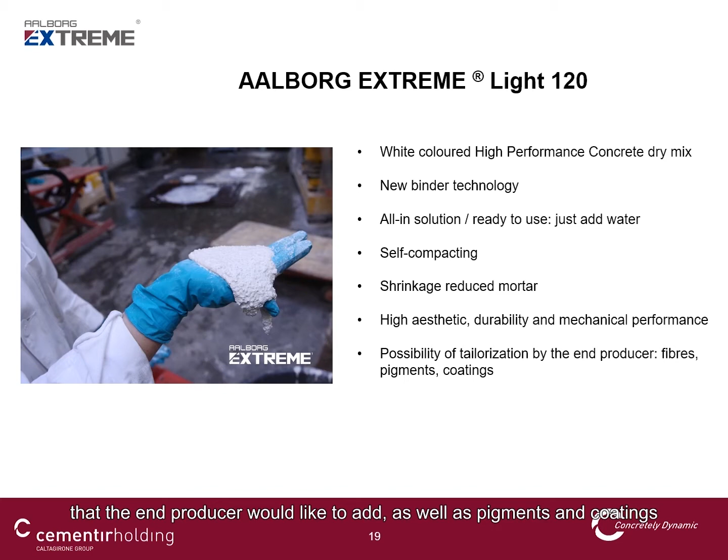So we take the bag or the big bag of AALBORG Extreme Light 120. For each 25 kilos bag, we add 1.95 to 2.1 kilos of water, and then when we mix, after 10 minutes of mixing, we will have a white self-compacting minimum 120 megapascal compressive strength after 28 days and durable material.

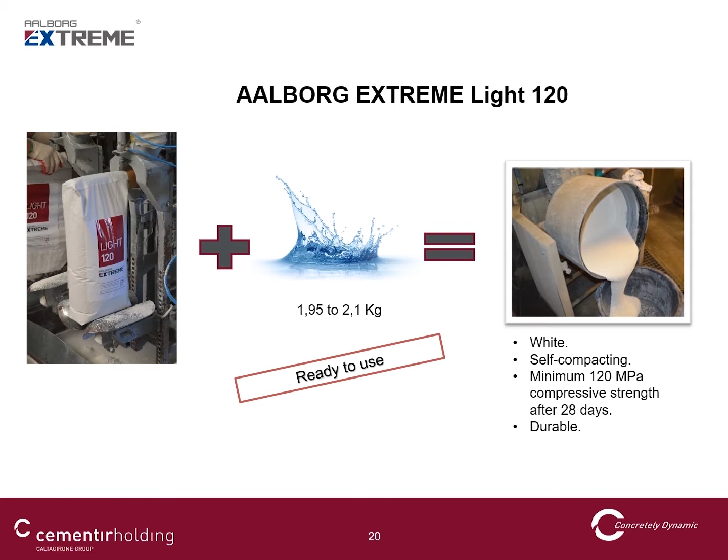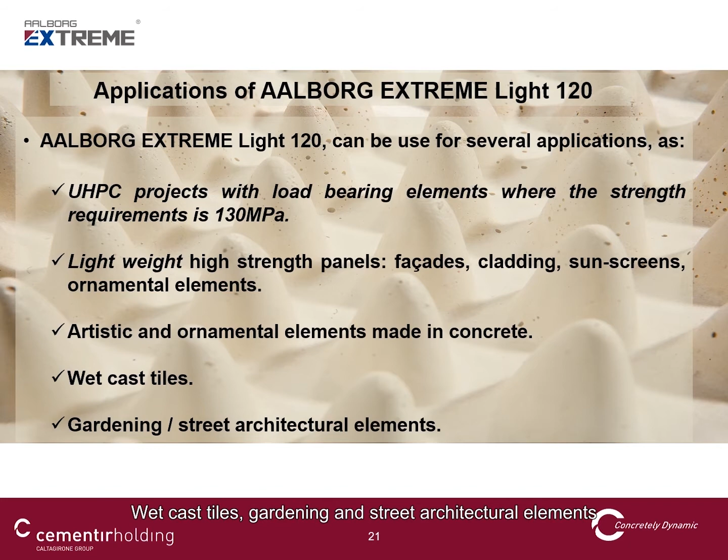There are a universe of applications that hasn't been explored yet with UHPC, same with AALBORG Extreme Light 120, but if we have to point at some of them, I would say that we will have, for example, UHPC projects with load bearing elements where the strength requirement is around 130 megapascal, lightweight high strength panels like facades, cladding, sunscreens, ornamental and artistic elements made in concrete, wet cast tiles, gardening, street architectural elements.

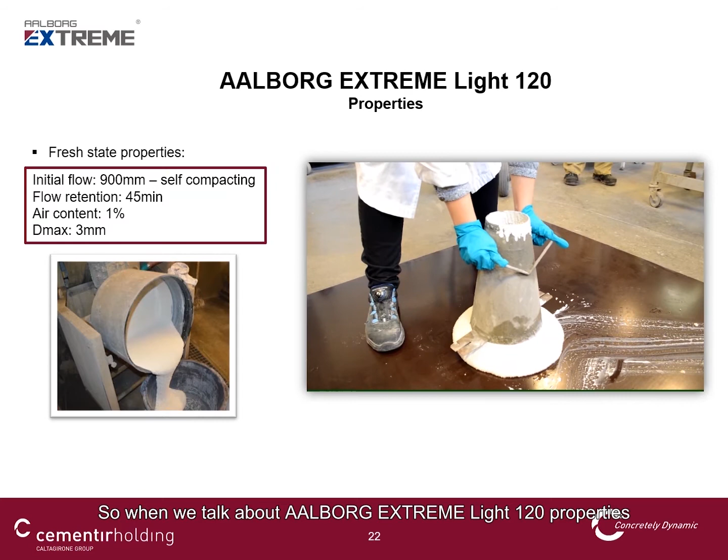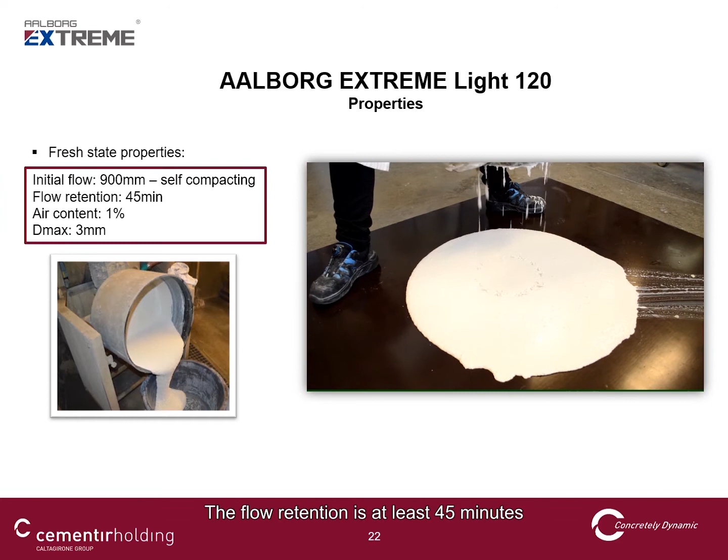So when we talk about AALBORG Extreme Light 120 properties, in terms of fresh properties, the initial flow is more than 900 millimeters, meaning that it's a self-compacting material, as you can see in the video here. The flow retention is at least 45 minutes. Air content is 1%, and the maximum particle size is 3 millimeters.

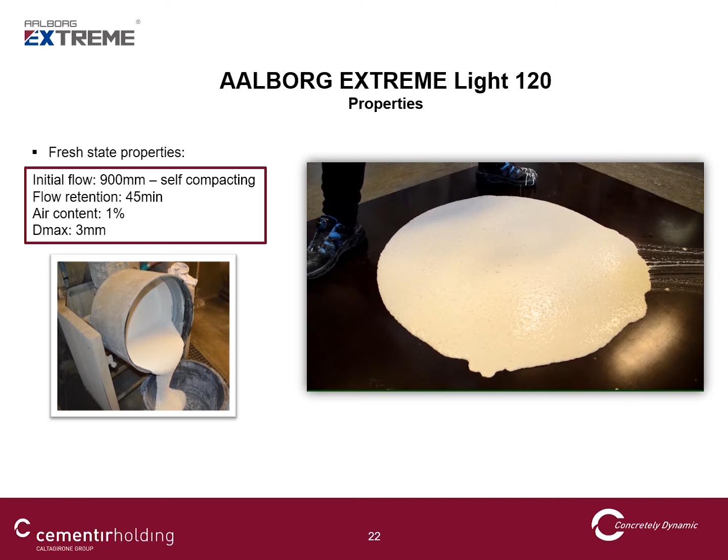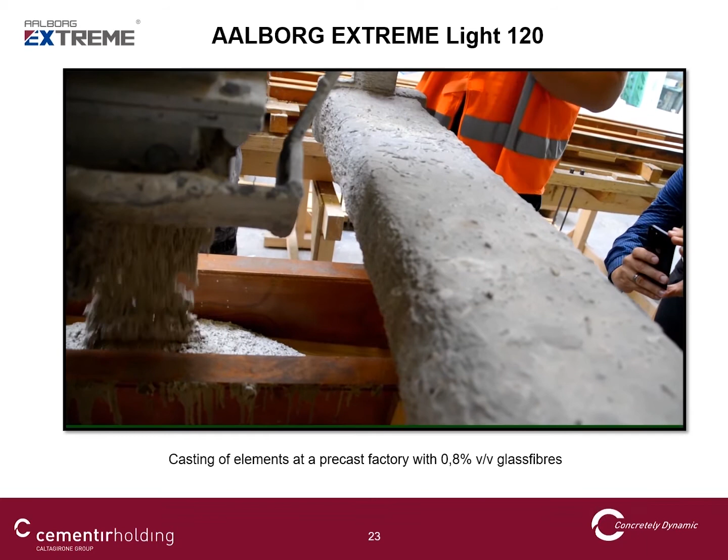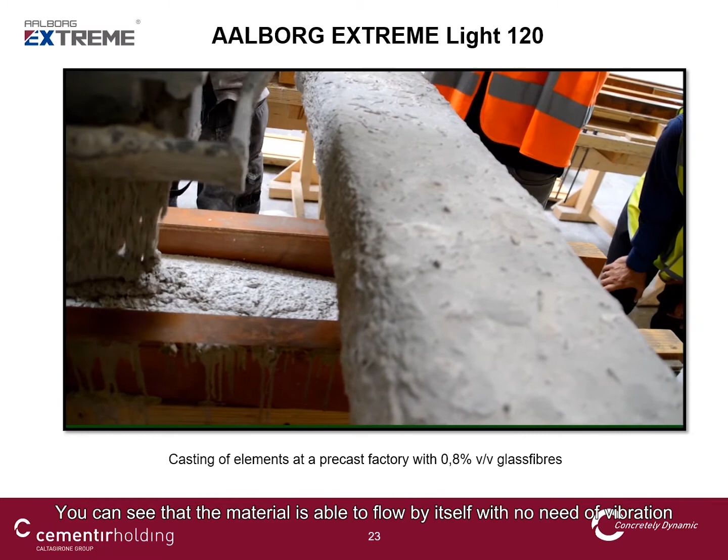So here you can see one of our first trial castings at a customer site with 0.8% volume of glass fibers and the lowest range of water dosage, because that was one of the customer's requirements. You can see that the material is able to flow by itself with no need of vibration. And yeah, I will let you just see the video.

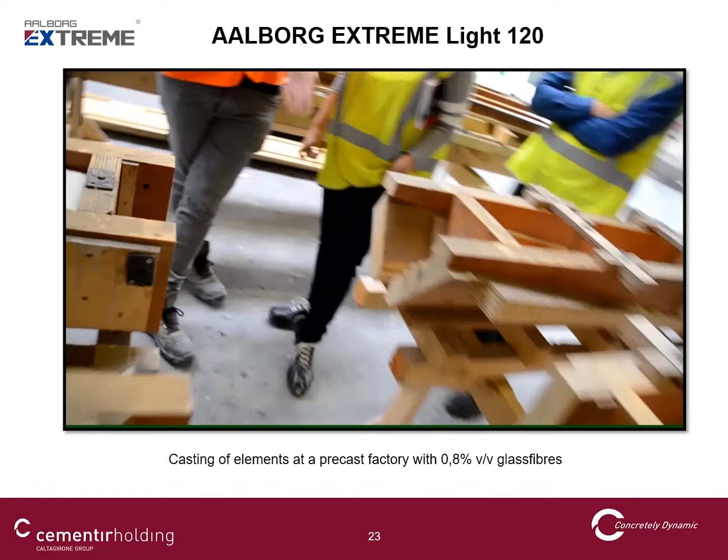These are the properties without fibers of our material, the hardened state properties. We have a shrinkage of less than 600 microns by meter at 90 days, setting time between 6.5 to 7 hours, a very high one-day compressive strength.

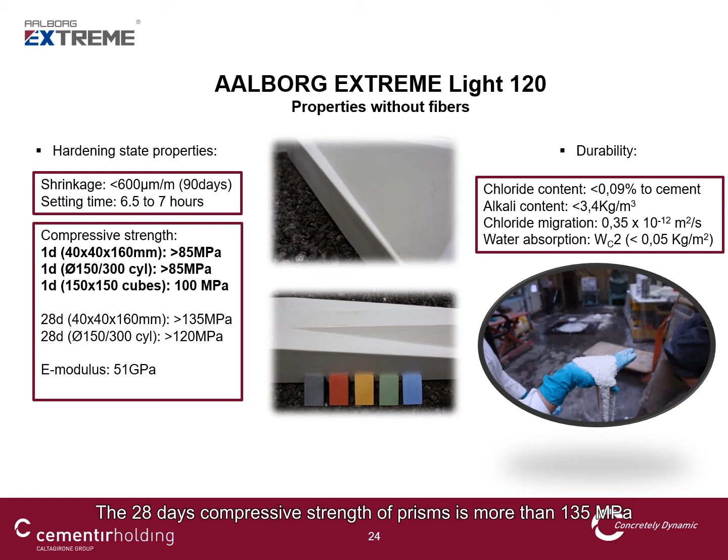In prisms will be more than 85, also in 150 by 300 cylinders, and 150 by 150 cubes, 100 megapascal, and 28-day compressive strength more than 135 in prisms and more than 120 in big cylinders. The E modulus around 50-51 gigapascal, and we also made and measured

lots of durability parameters like chloride content and alkali content and chloride migration and water absorption. They're all in the very good range of durability parameters, but if you want more information about them, you can always consult the product specifications datasheet, where we go more in detail with all these properties, and you can also see there according to which standard we measure them.

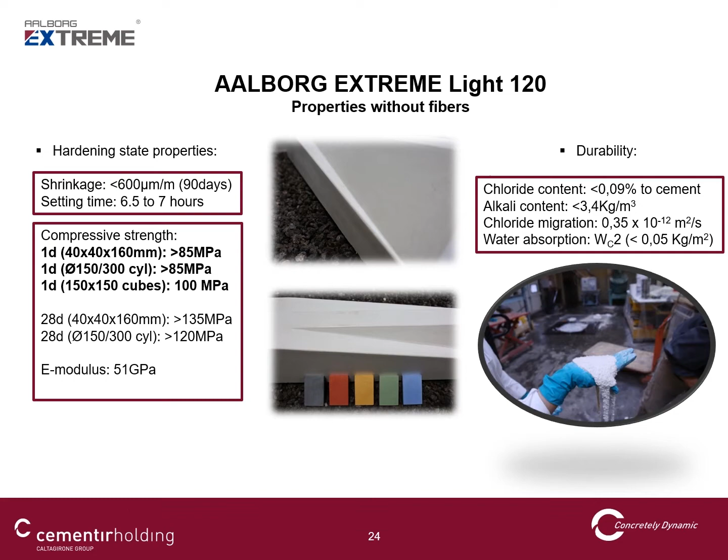It is well known in the UHPC industry that the mixing of high and ultra high performance concrete is different than for standard concrete. Due to the very, very low water addition, it needs a lot of energy to be mixed. So very, very high efficient mixers need to be used.

In the case of Aalborg Extreme Light 120, we recommend that the first time the customer mixes it, they use a lower capacity than the total capacity of the mixer, between 20 and 30%, and then the batch size can be adjusted afterwards. The material will look dry at the beginning for the first 4 minutes, but no more water needs to be added, because due to the chemistry inside the product, it will become fluid after that time.

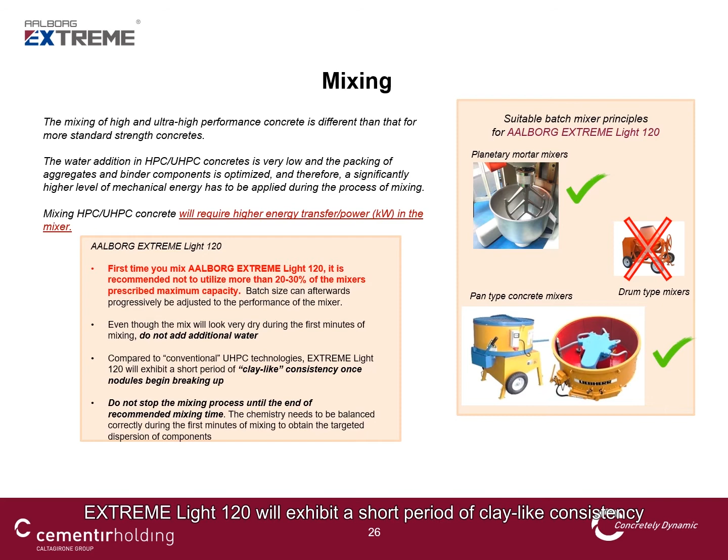And compared to conventional UHPC technologies, silica fume based, quartz flour based, etc., Extreme Light 120 will exhibit a short period of clay-like consistency, where you will see the formation of nodules, but they will start breaking after, like I said, 4 to 5 minutes of mixing time, and then the consistency will be completely fluid. It's important, don't stop the mixing process until the end of the recommended mixing time, that is around 10 minutes.

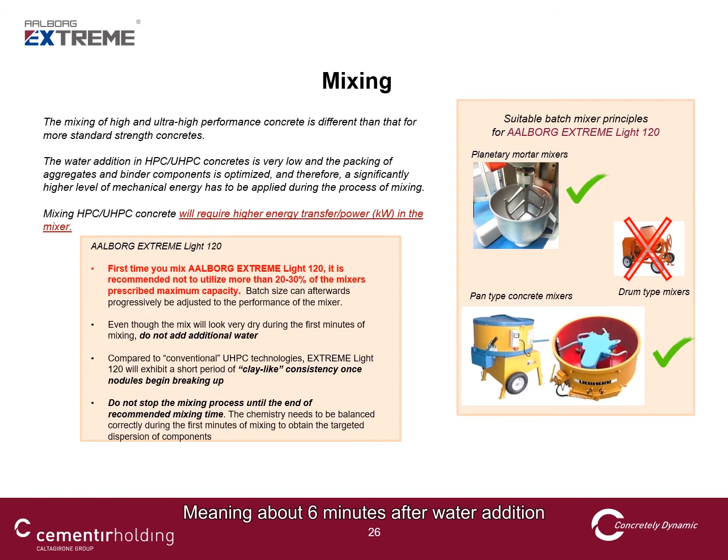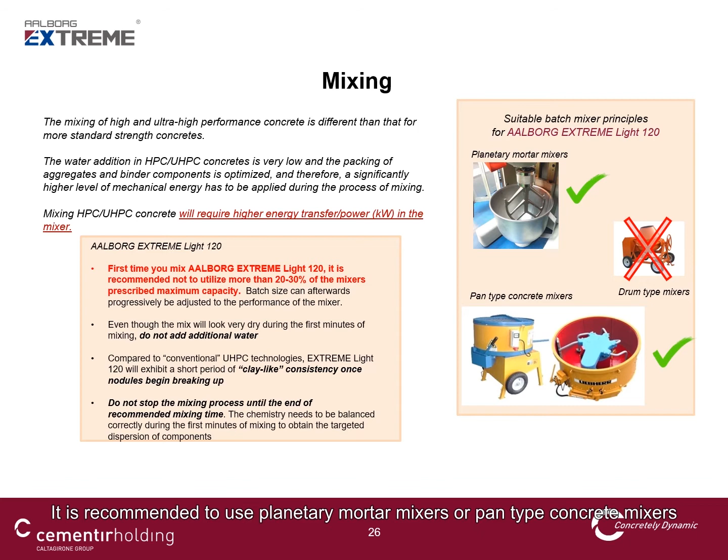And if the customer would like to add fibers, they need to be added after the material is fluid, meaning about 6 minutes after water addition. Drum type mixers are not recommended for UHPC. It's recommended to use planetary mortar mixers or pan type concrete mixers.

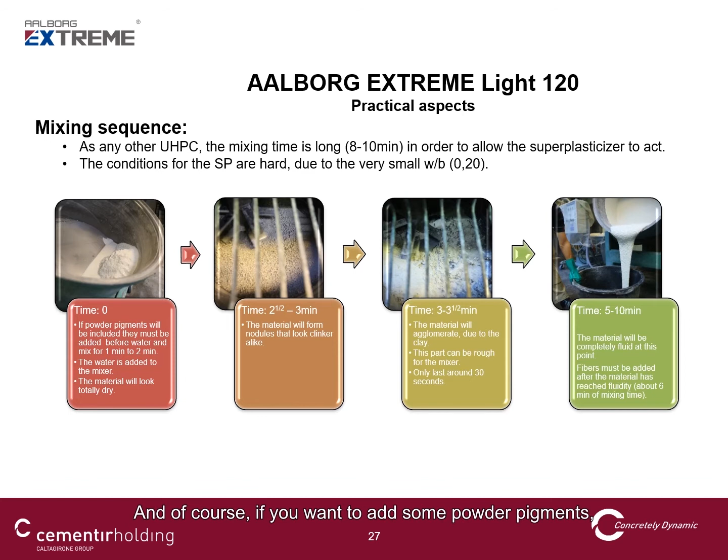So we have divided the sequence into different times. At time 0 you add the dry mix to the mixer. If you want to add powder pigments, this is the moment to add them. You need to mix the dry mix for between 1 minute and 2 minutes maximum, depending on your mixer—you have to check the first time you do it. The dry material should look homogeneous.

Then we add the water. At the beginning, the material will look dry. After 2.5 to 3 minutes, it will form nodules that look clinker-like, like little balls. Then from 3 to 3.5 minutes, the material will agglomerate due to the clay. This part is the roughest for the mixer, but only lasts 30 seconds, and if the mixer is very efficient, it can last even less.

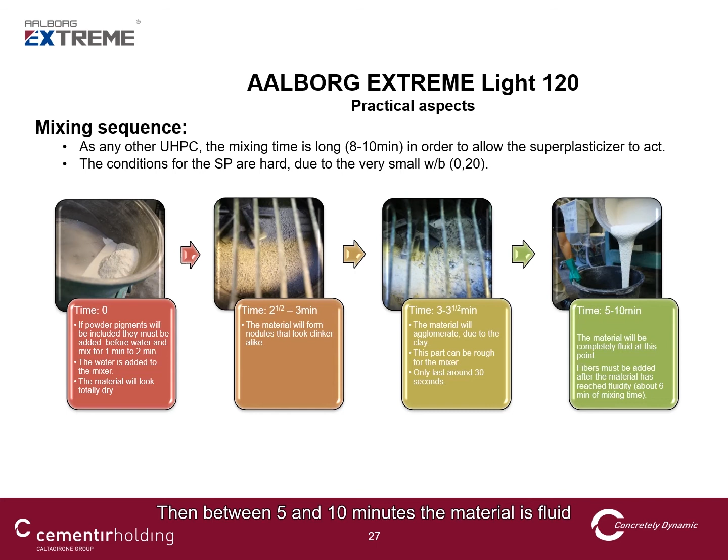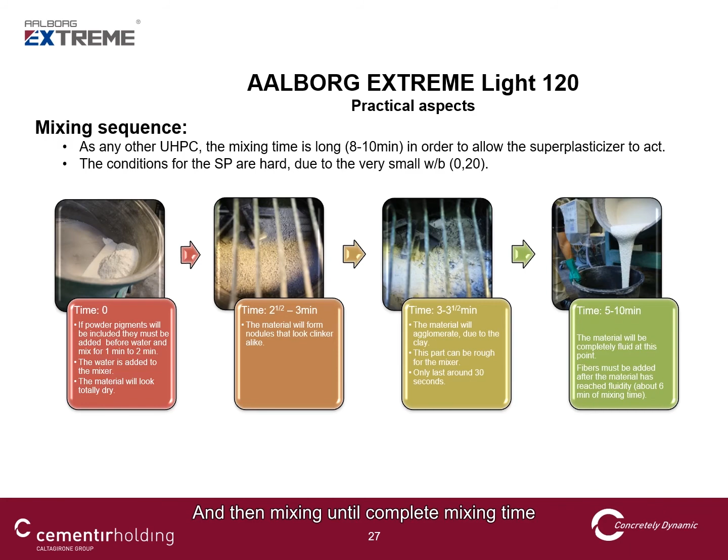Then between 5 and 10 minutes, the material becomes fluid. If you want to add fibers, add them around 6 minutes, so the material is already fluid enough, and then mix until the complete mixing time.

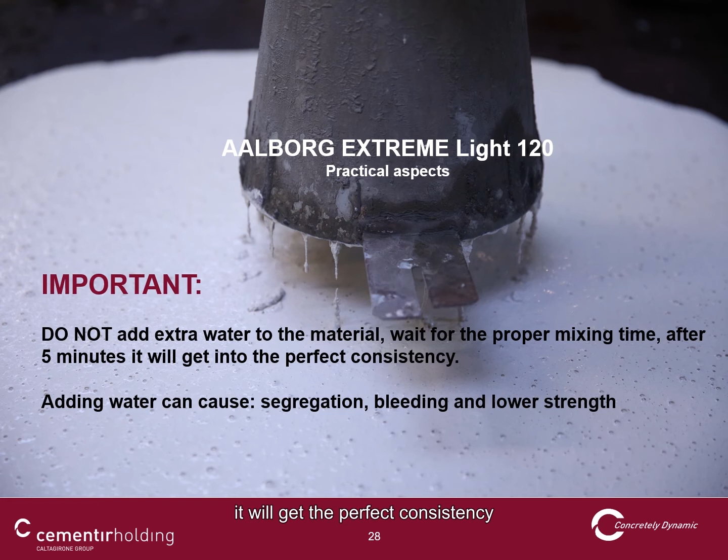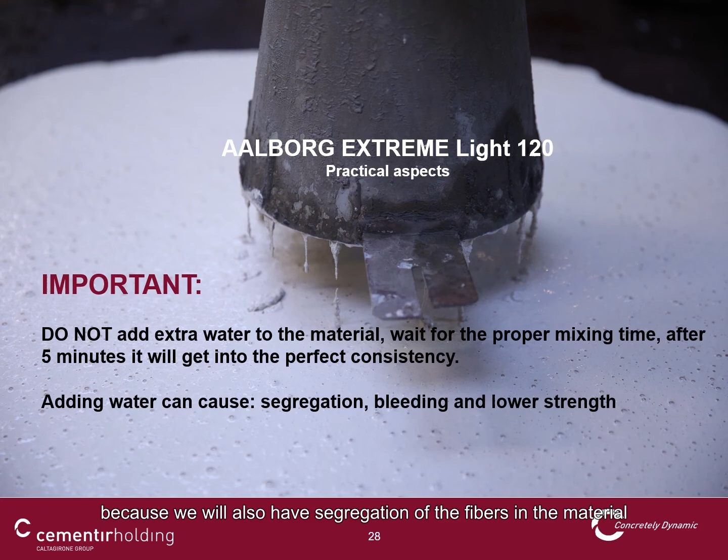As I said before, it's very important not to add extra water to the material. You just have to wait for the proper mixing time, around 5 minutes, and it will get perfect consistency. Adding extra water can cause segregation and bleeding, and of course lower strength. If we have fibers, the problem will be even higher, because we will also have segregation of the fibers in the material.

For the majority of castings, Aalborg Extreme Light 120 does not need vibration, as you saw in the video before. But of course, if the user wants a very detailed shape, or the fiber content is very high, it's allowed to vibrate it. It's not going to cause any harm to the final product.

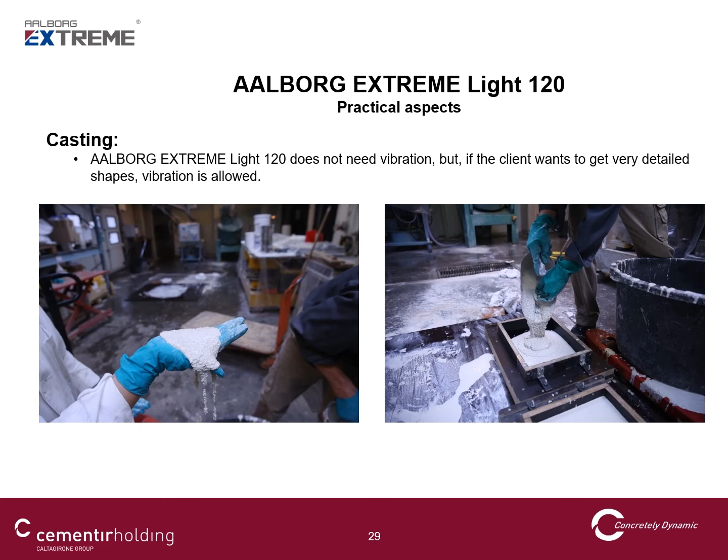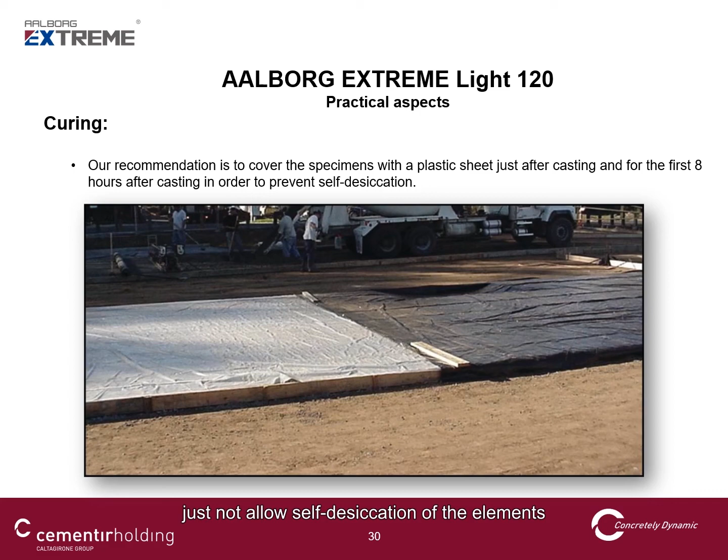In terms of curing, our recommendation is to protect the element from evaporation, meaning it can be covered with a plastic sheet, or a curing agent can be applied to the product. All this is to avoid self-desiccation of elements cast with Aalborg Extreme Light 120, but these practices are also used for traditional UHPC and even traditional concrete elements. So you just have to be careful that what you do does not allow self-desiccation of the elements.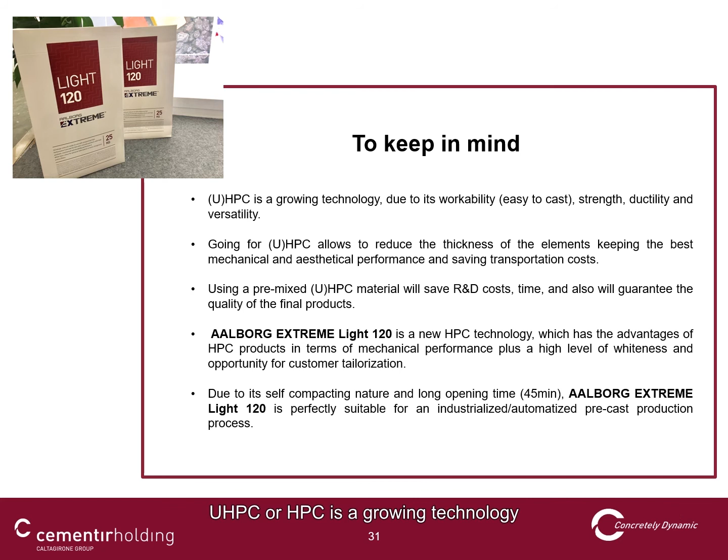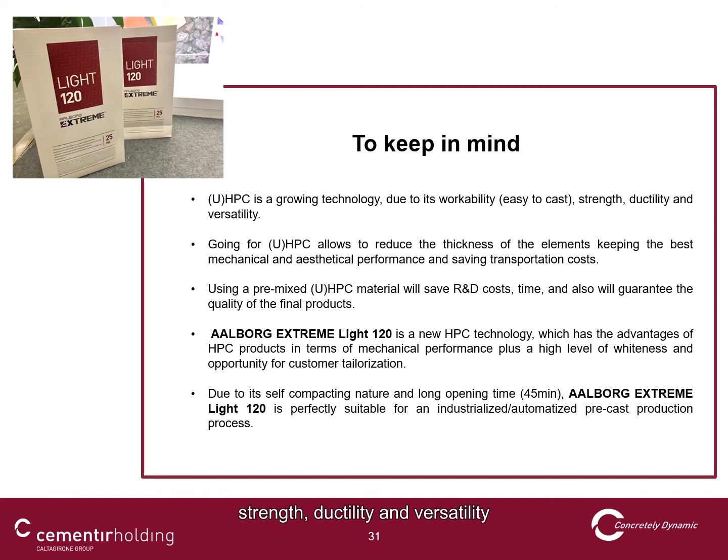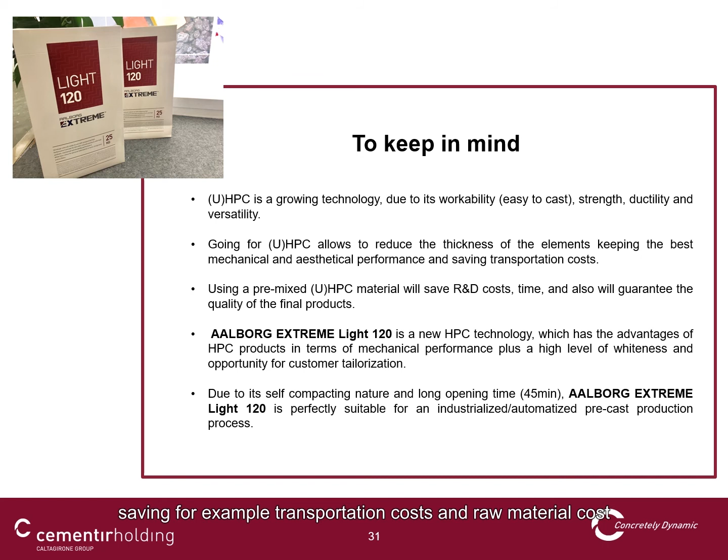Now I would like to close this presentation with some points to keep in mind. UHPC is a growing technology due to its workability, making it very easy to cast very challenging shapes, strength, ductility, and versatility. Going for UHPC allows reducing the thickness of elements while keeping the best mechanical and aesthetical performance, saving, for example, transportation cost and raw material cost. Using a pre-mixed UHPC material will save R&D cost and time, and will also guarantee the quality of the final products.

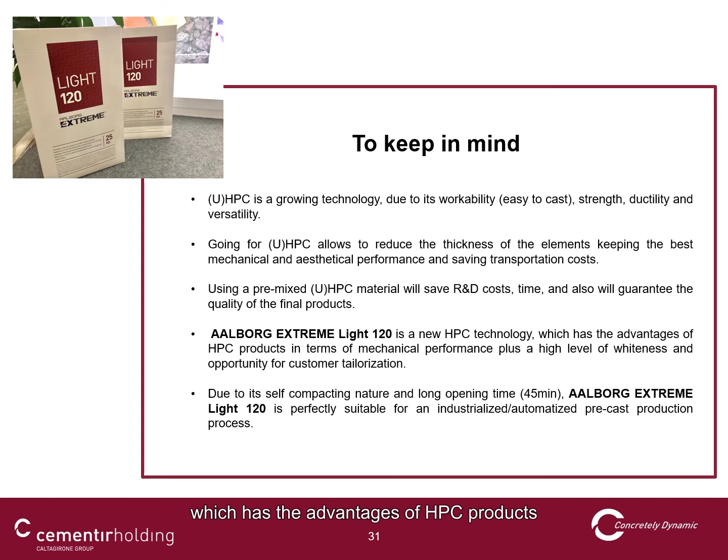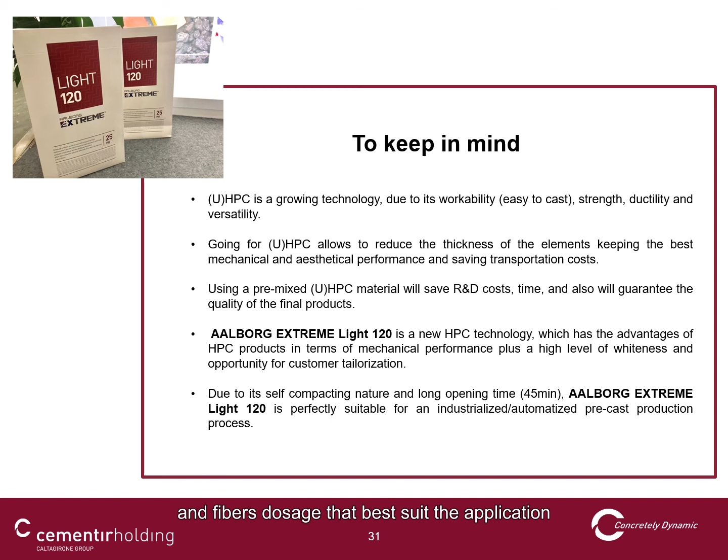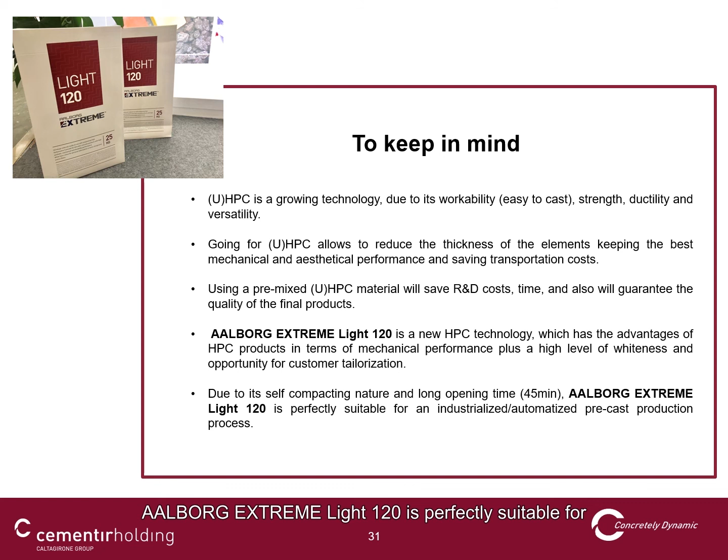Aalborg Extreme Light 120 is a new HPC technology which has the advantages of HPC products in terms of mechanical performance, plus a high level of whiteness and the opportunity for customer tailorization by adding pigments and selecting fibers and fiber dosage that best suits the application. Due to its self-compacting nature and long open time of around 45 minutes, Aalborg Extreme Light 120 is perfectly suitable for an industrialized, automated precast production process, so it can be introduced into the precast factory easily.